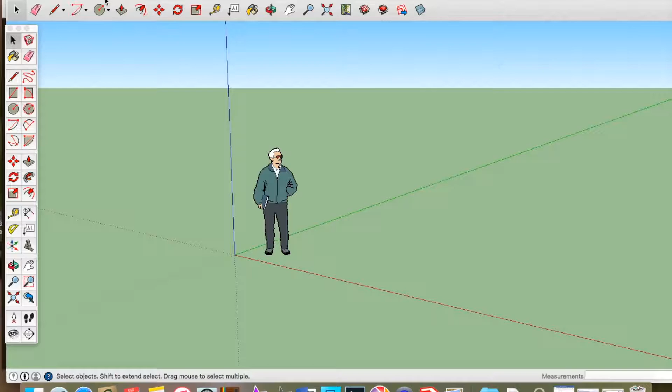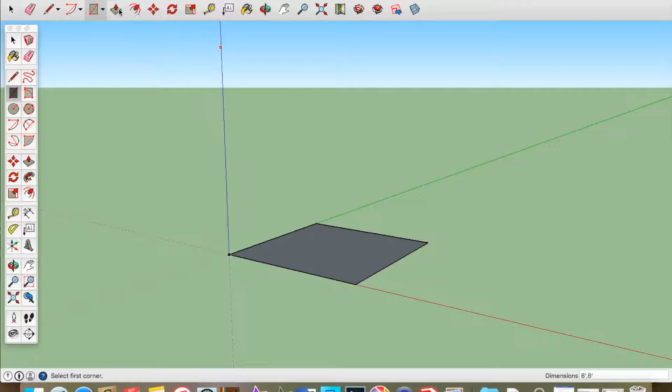Alright, so we're going to work with intersecting parts. Start out with a rectangle tool and make a square. It doesn't matter the size, just get that square showing up. I'm going to make this 8 by 8, then lift it up with the push-pull tool and make it 8 foot also. Again, I don't care what size your cube is, just make it whatever.

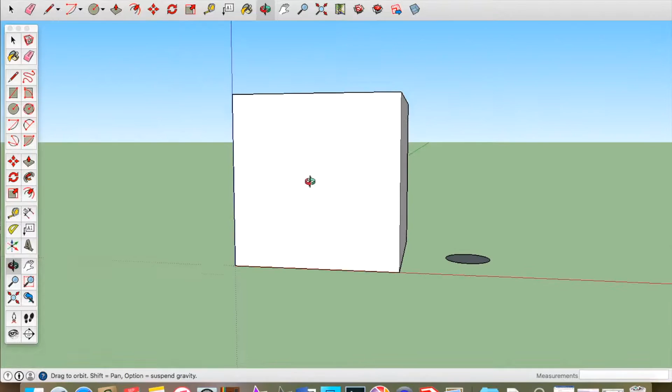Now I'm going to make the circles that will end up being the holes for the dice we're making. Do one flat on the surface, then turn it so it's barely a line there. Find the center and make another circle going vertically in there. Click on that circle and hit the follow me tool. Then we'll make that see-through so we can erase the inside circle, because we don't want that causing problems later.

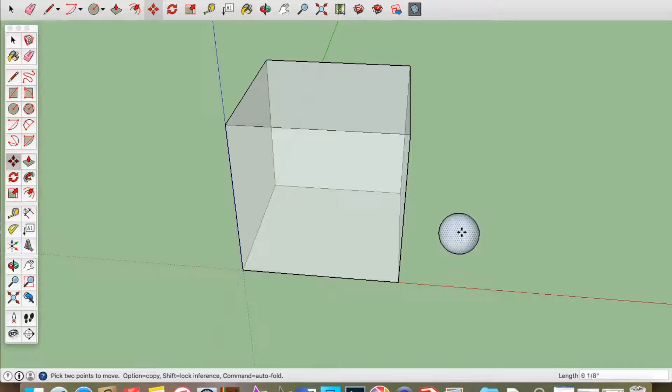Now we're going to select this and go to the move tool. Moving this is kind of difficult, and you'll see me flip around a bit here. You want to get it on the blue, green, or red line when you're moving it - that's the easiest way to figure out where you're at. You can see I have to rotate around several times to get this in the right spot, and it's kind of aggravating, but if you can get on those red, green, and blue lines, it helps.

You have to rotate to make sure you're into the surface here, so that sphere is halfway in. I think I'll have to rotate around further here - I see I'm not even close to being in this square or cube. Now I'm about halfway in, we'll see if I'm in the right spot. Looks like I'm still outside, so we'll try to pull that over. This is the part that will take you the longest, trying to get these things positioned, because it's kind of a pain. Now I'm going to go to the top and try to place it in the middle of that corner instead of onto the one side like that.

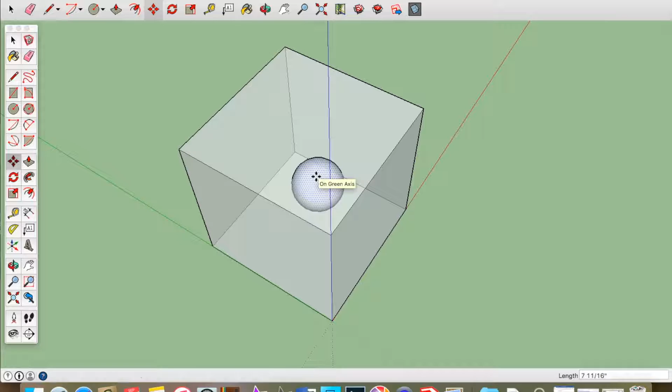The next thing we're going to do is select that and resize it by hitting S for scale, because it's a little too big. So I'm going to take the size down, and now I have to move it over again to get it in the center.

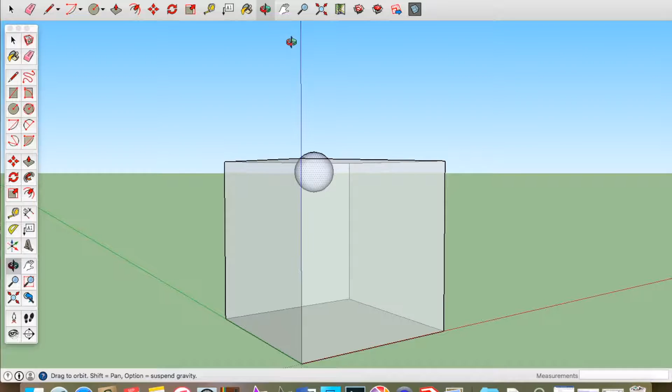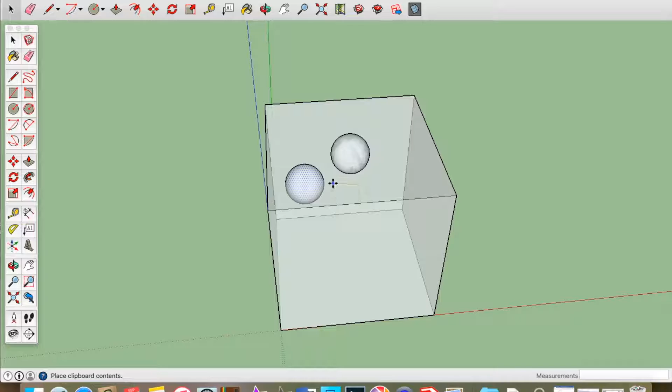Then we're going to select this and copy and paste it 2 more times. Move this up just a little bit so it's halfway. Select it and hit Command C to copy, Command V to paste. We're going to put one in the middle, then Command V and paste and put one in the corner. Now we're going to move this around to make sure they're in the right spot.

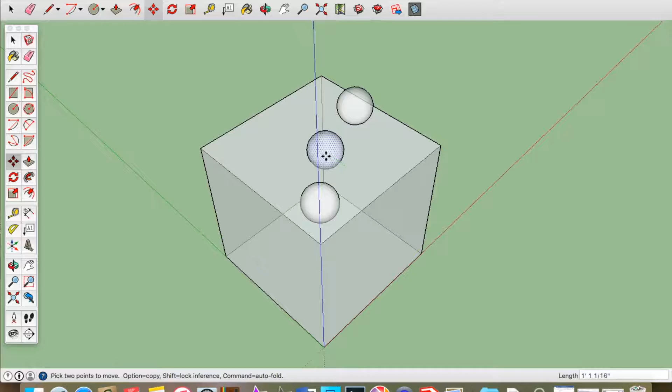You can see they're floating above, so we've got to pull them down into the die. Now I've got to get the last one. Actually, I need to pull this down just a little bit more. And that's about at the same level as the other one.

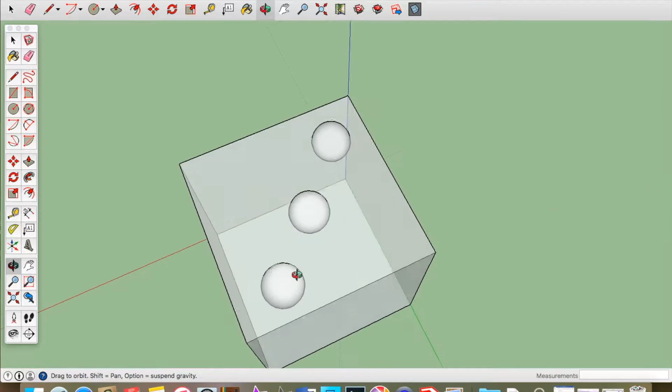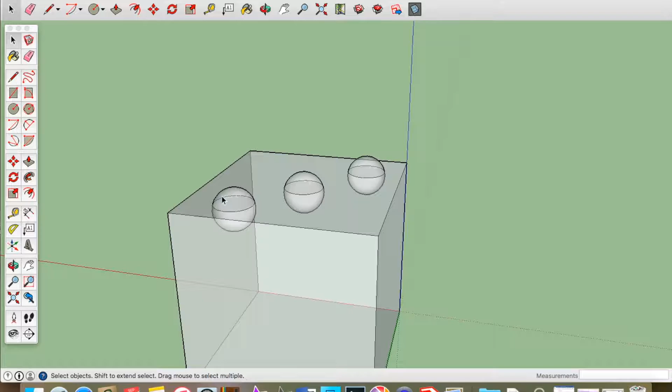Once you have all of those in the right position, we're going to select these using the select tool, holding down shift as we're selecting them so we can combine the top and the bottom. We're going to go up and do intersect faces with selection, and you'll notice it puts that circle around there. Then again, using the select tool, we click on the top of the spheres, selecting them, and hit the delete button to take the top off. Sometimes you get something like that - it just means you haven't selected the whole thing. There you go, and we'll do that to all 3 of them.

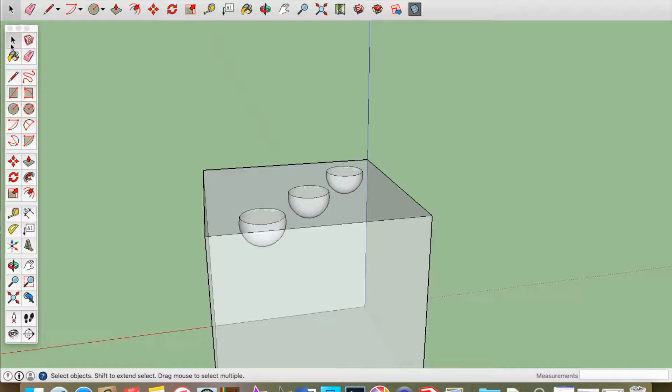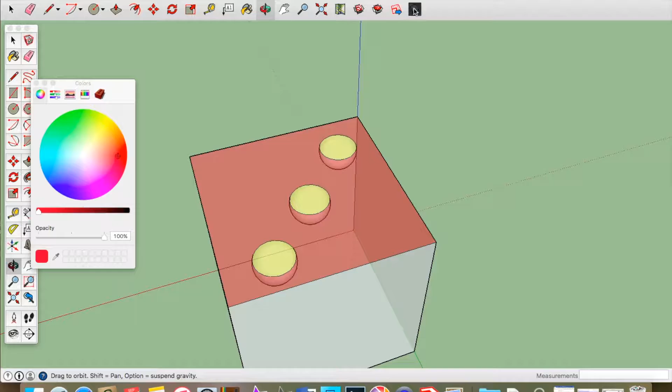Then you're going to paint those holes. The only problem is, in my demonstration, after I painted the top and the holes, I realized the holes don't sink in because I still have a top surface on there. So I'm going to go to the select tool and take that top surface out so the dimple of the holes is actually in there. I'll just delete that, and then you can see the hole going down in, and then I'll color it again.

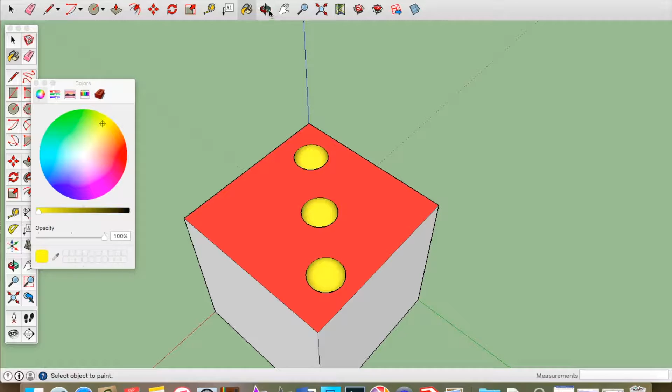Alright, the next thing we're going to work on is an eyeball. The first thing we're going to do is make a circle, then rotate it, and make another circle within it vertically so that we can make a sphere.

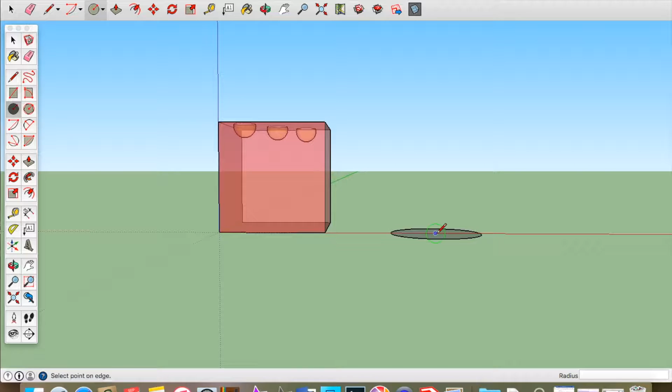We will click on the vertical circle and then hit the Follow Me tool. Then I'd like you to get the eraser and erase the inside circle. You may have to turn on the see-through view, the X-ray view, to do that.

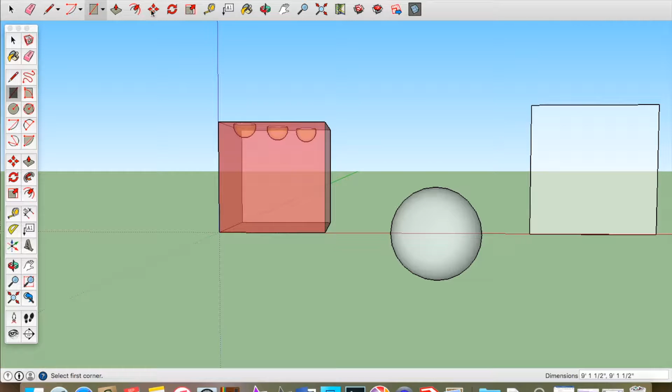Once we have that done, we are going to make a rectangle. I'd suggest doing it on the red line because it's easier to make a vertical rectangle instead of, like I ended up doing, a square or a flat horizontal rectangle. We want it up and down.

What we're going to do is insert it into the circle here, the sphere, to cut it in a little less than half. Again, if you can get on your red, green, or blue lines as you move this, you have better luck getting it in there. Changing views sometimes is going to help you also.

Alright, so I have it partway in there. What I'm going to do is bring it to the front now, a little bit forward of halfway.

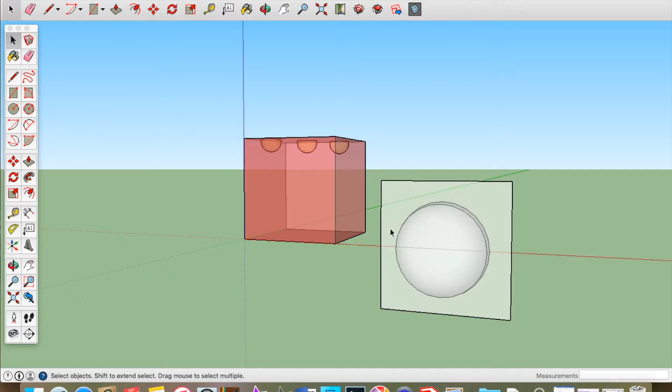Then I am going to select both parts and do the intersect thing with them again. I'm selecting the sphere and the rectangle, holding Shift down when I do that. Then I'm going to go up and go to intersect faces, with selection. That creates that circle around through there, and then I'm going to erase the rectangle around it.

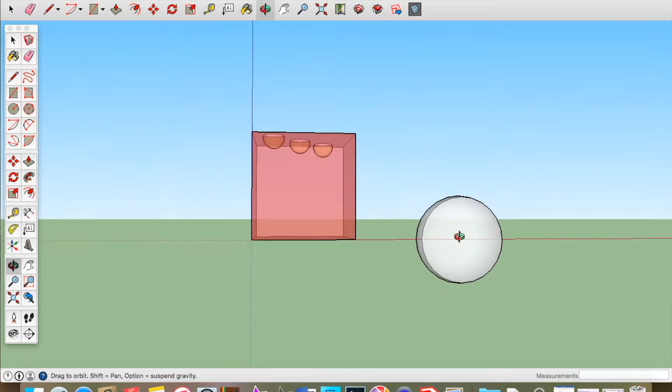This will be for the color of our eyeball, and the next rectangle that we're going to put in here is going to be a little bit further in front of that, so that will be the black of the eyeball that we'll have. So once again, get yourself positioned, go to the red line, put your rectangle on it, go up with it vertically again.

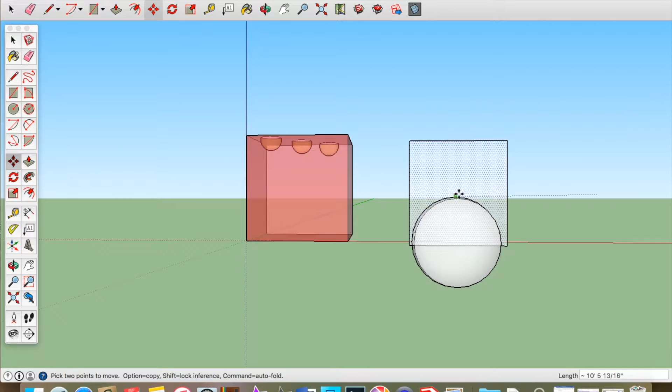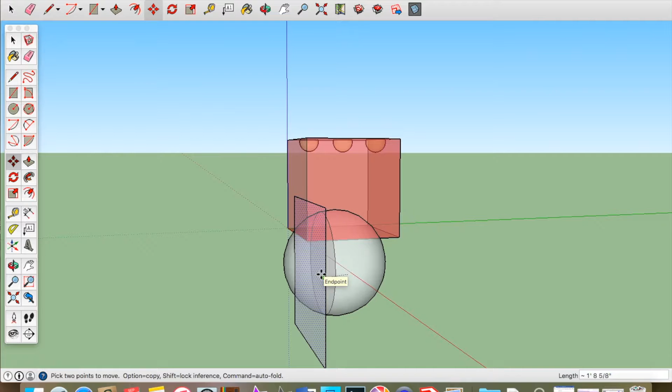Select it and then go to the Move tool, and then we're going to try to get it inside the sphere again. You're better off getting on the red line and then turning it and moving it forward. You just want it in front of the last rectangle. Now I need to get it into the sphere.

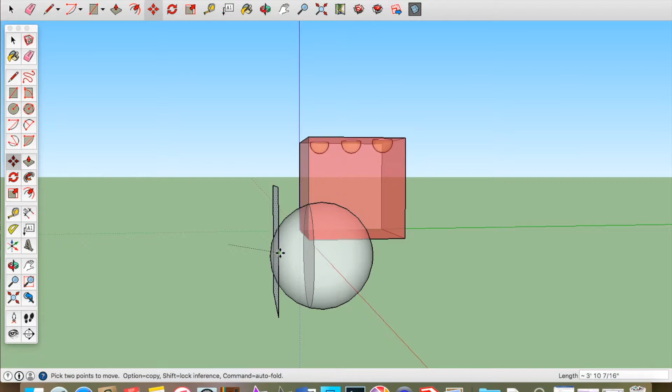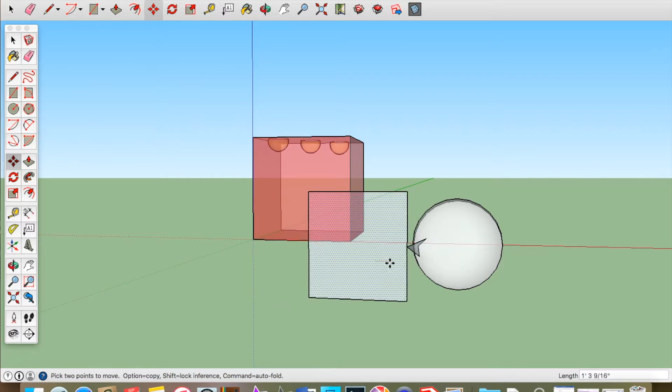Looks like I'm off to the side here. Now what happened is it is touching part of that, so when it's moving it's moving part of the sphere also. So I'm going to hit Command Undo and go back to where I was and try this again. Command Z is the undo.

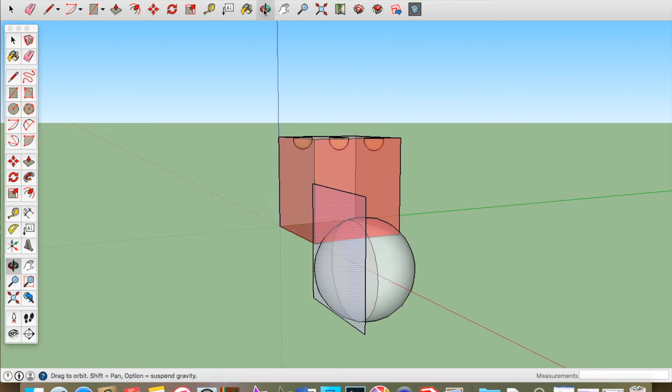Okay, it looks like I need to put it down just a little bit so that I get the bottom part of the circle in there also. Then we're going to do the select thing again, once we're sure we have that in the right place.

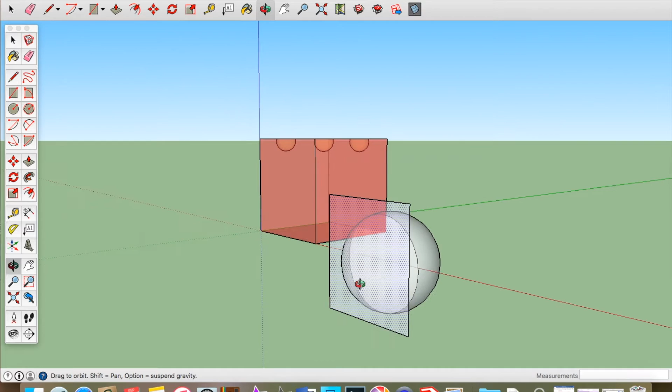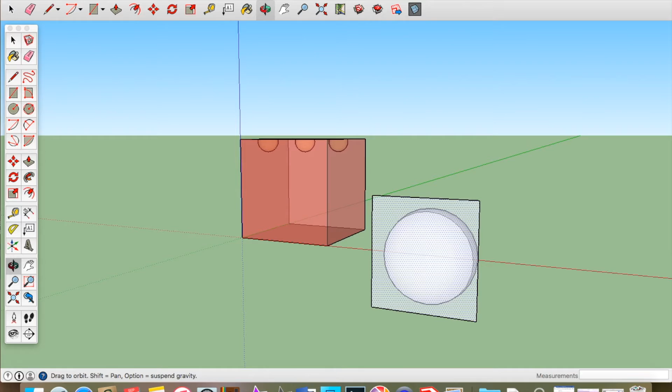So we will select the sphere and the rectangle, holding down Shift while we do that. Then we're going to go to intersect faces, and you want to do it with selection, so I must not have something selected correctly. Okay, we'll try with model and see how that works. And then erase the extra, and that seems to work fine.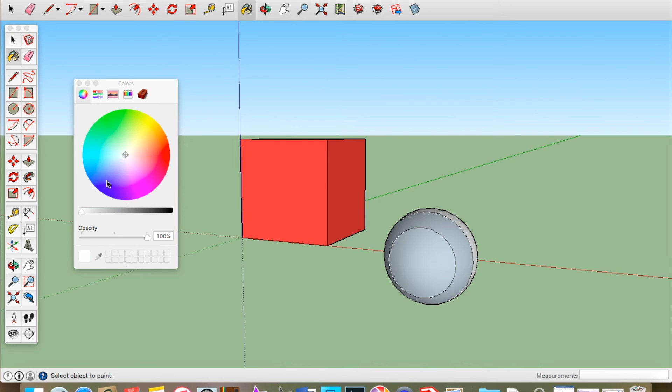Now what you want to do is fill in some color on the eyeball. So we are going to go to the paint bucket and make the back part white, make the middle part blue, make the front part black. Honestly, it looks kind of like a dilated eye. It needs to be a little smaller in the front, but you get the idea.

And that's how you can section off and put different colors on a single object as you do it. You just have to cut a plane into it to create that.